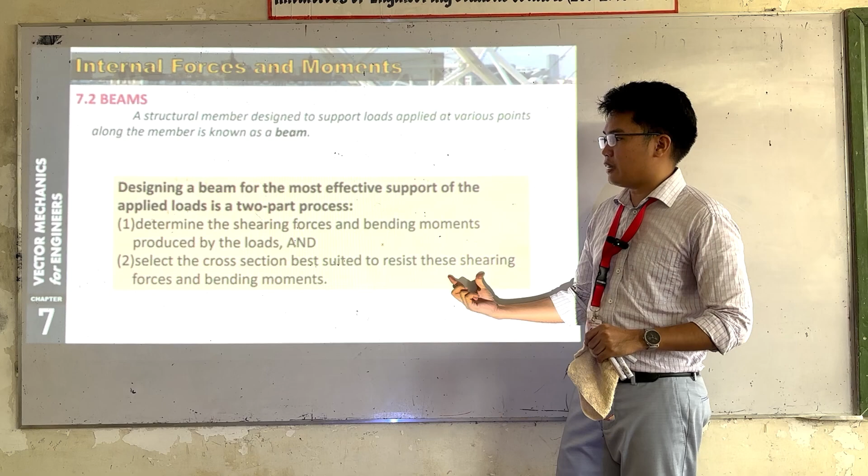So dalawa yung approach natin dito kung mag-design tayo ng beam. First, we should know ano yung value ng bending moment at saka shearing force natin dyan. Kasi sa 164, yung stress natin is just force over area. Yung force natin dito, somehow yung in-apply natin sa beam is a shearing force.

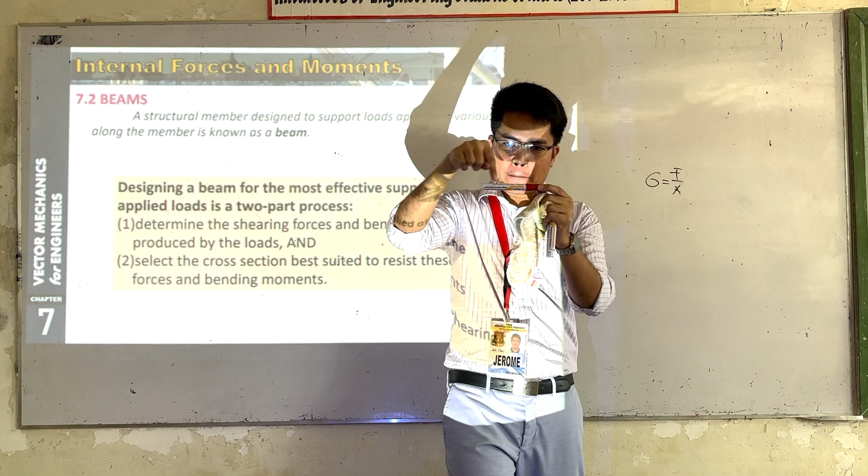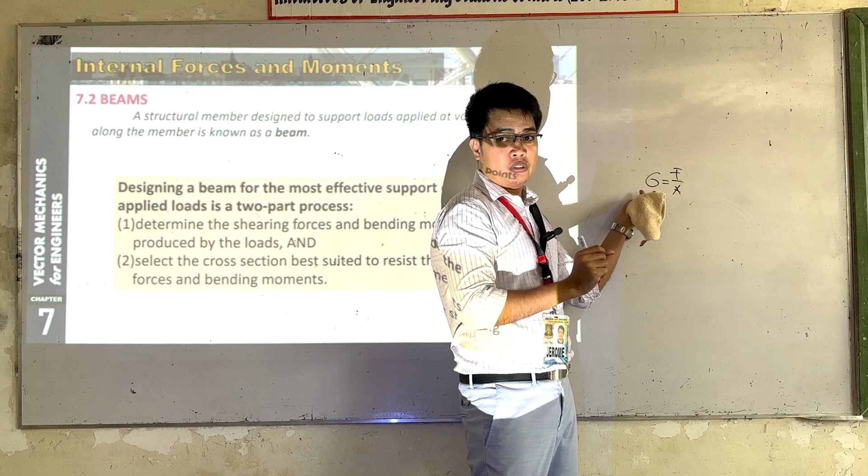Kung malalaman mo yung nasolve natin kanina, sa beam natin, at every point, iba-iba yung shearing natin. Kung mahahanap mo yung pinakamalaking shearing, at that point yung unang mag-fail. Bakit? Kasi kung makuha mo yung shearing force na maximum dyan, alam mo that the stress is directly proportional to the force. Ibig sabihin, kung nasaan yung pinakamalaking force, dyan yung pinakamalaking stress. Kung dyan yung pinakamalaking stress, dyan na point unang mapifail yung beam natin.

So ayan lang, for this topic, sa ENS 164 na to. Di ba, two parts? The first part here is ENS 161. The second part ng pag-solve natin dito na i-insert si ENS 164. So at this part, dito na malalaman kung ano yung klaseng beam na standard na gagamitin mo. I-beam ba, rectangular beam ba, or anong mga beam? Nakatabulate yan sa 164.

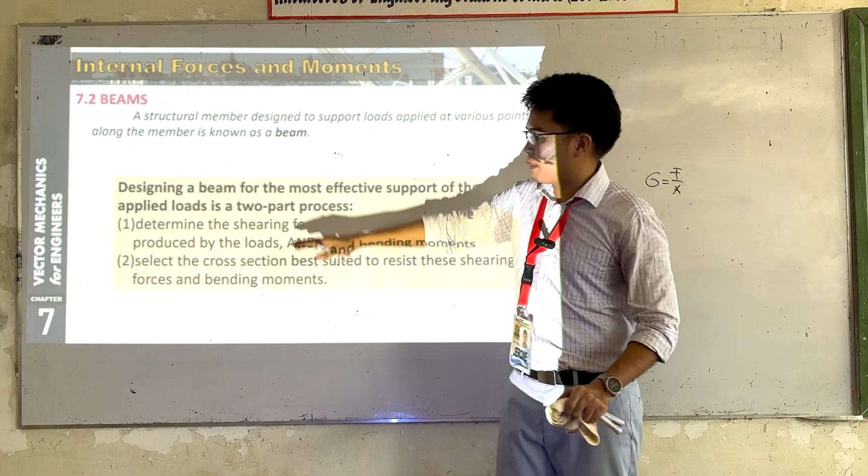So since 161 pa tayo, dito muna tayo, sa first part. So paano natin yan i-solve? Dalawa yung approach, so first approach natin ito muna. Before that pala, discuss muna natin dito.

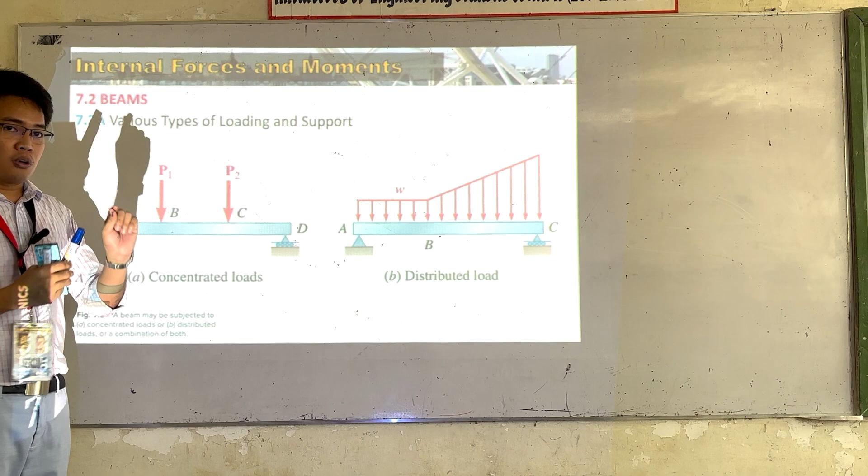So yung beams natin, meron dalawang klaseng load na pwede natin i-apply. One is concentrated load, wherein yung load natin is kino-concentrate natin at one point. And then we have distributed load, nakadistribute yung load. We have here, kung straight line, ibig sabihin, yung tawag natin dito is uniformly distributed load. Kung sasabihin sa problem na a uniformly distributed load is applied at that point, at that segment, ibig sabihin niya dito is yung load is a straight line. And then we have here, ayan, pag ganito.

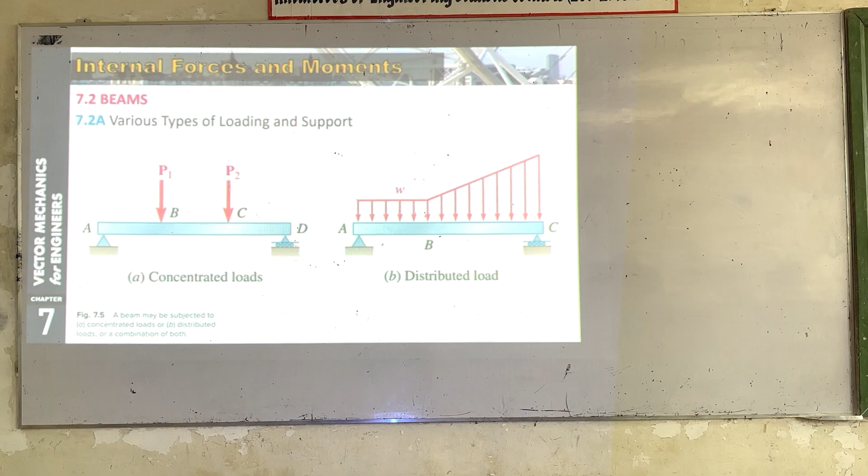So we have concentrated and distributed load. How about mga beams natin, application? We have for trusses or roof support, for example ito siya. So iba't ibang klaseng beam. If we have a combination of a pin and a roller, yung tawag natin sa beam na to is a simply supported beam.

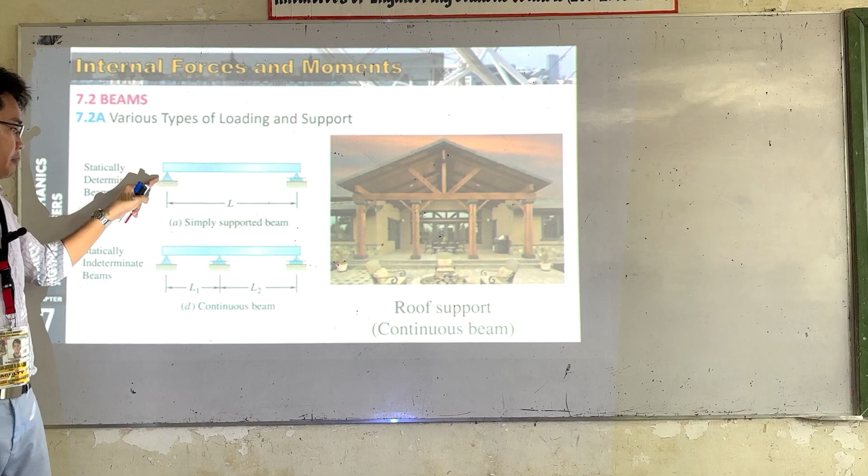Okay? Now kung mag-apply pa ako ng another roller dito, ilang unknown dito? Isa, dalawa, and then meron din tayong dalawa dito. So 4 unknowns, 3 equilibrium equations, this kind of beam is statically indeterminate. So dito, masosolve pa natin to using 161. But at this part here, kailangan na natin yung knowledge natin sa 164 para masolve to.

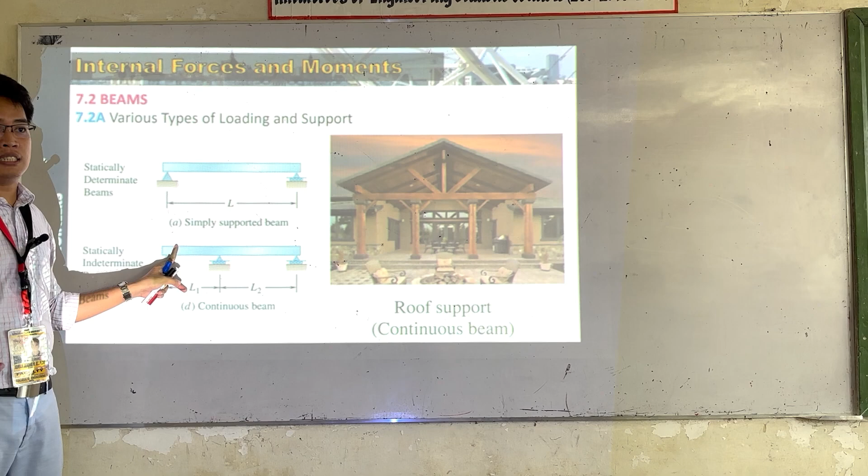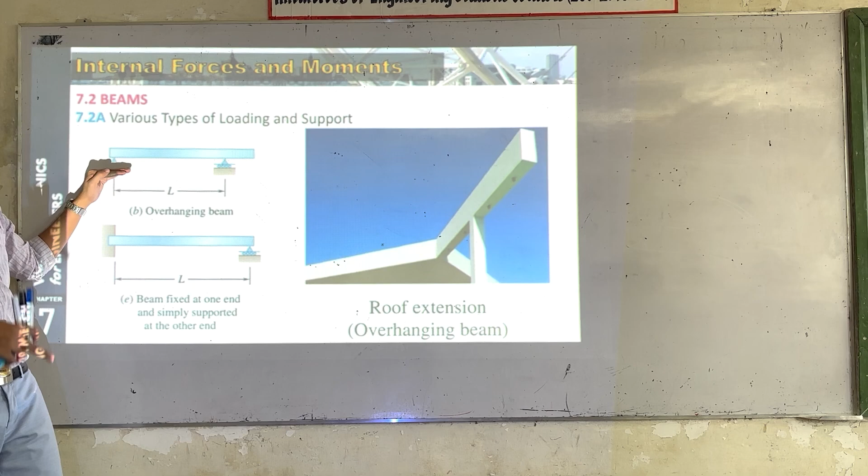Now kailan to maging statically indeterminate? Kung titingnan nyo dito, ilang reactions meron tayo dito? 3, plus 1, we have 4. So statically indeterminate na siya. Okay? Overhanging beam. We have also cantilever beam. Cantilever beam is fixed at one end, the other end ay walang support.

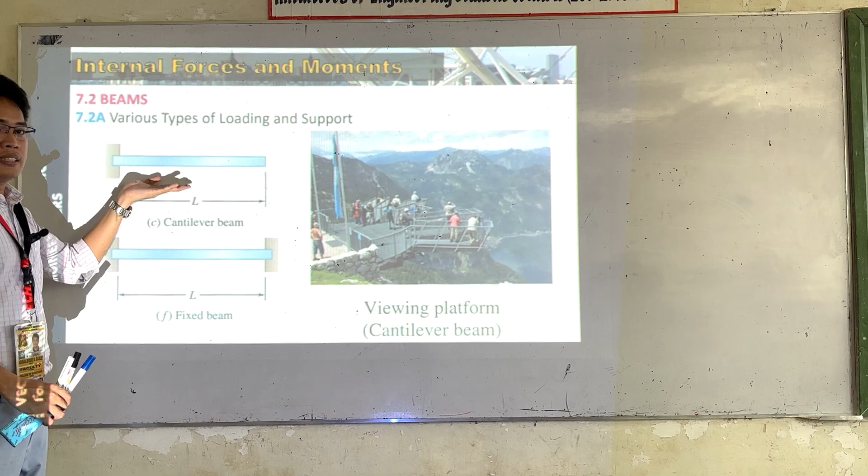Statically determinate, di ba. Kasi tatlo lang yung unknown. So kung lalagyan pa natin dito, ilang unknowns na dito? We have 6, so hindi na natin ito masosolve. Kailangan na natin ng ENS 164.

So cantilever beam. Kailangan kayong familiarized sa mga tawag ng beam dito, kasi minsan sa exam sinasabi lang na a cantilever beam, an overhanging beam, hindi na sinasabi kung hindi na binibigay yung picture. Diretso na. So kung sabi niya overhanging beam at hindi mo alam kung ano yun, wala kang masosolve.

Ngayon, yung diniscuss natin kanina - kung may member tayo, at may in-apply tayong forces papunta doon at saka papunta dito, isa yun multi-force member. Tapos kinat natin dito sa portion na yun. Ano yung sabi natin kanina? Merong lalabas na internal forces at saka bending moment natin.

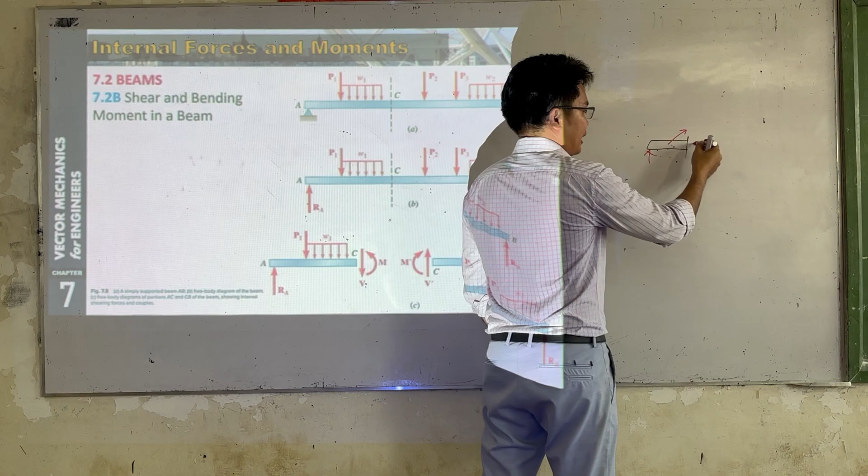Ano yung mga internal forces na yan? We have axial at saka shearing, and then we have a bending moment.

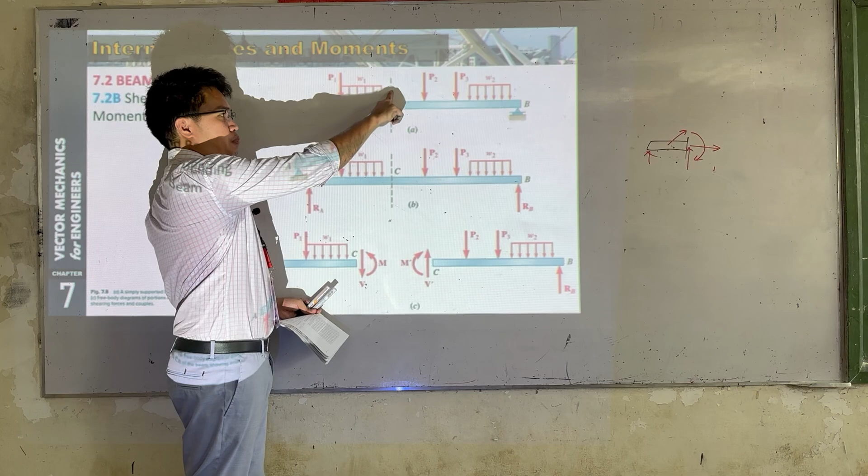So for example, we have a beam here, meron tayong uniformly distributed load and concentrated load na in-apply at different points. Ano yung gusto nating malaman ay yung internal forces at saka bending moment sa isang specific point. Anong gagawin natin? I-cut natin yung portion na yan. Pag-cut natin yung portion na yan, ano yung lalabas? Ito yung mga internal forces. At sa pag-drawing natin dito, meron tayong convention na pina-follow.

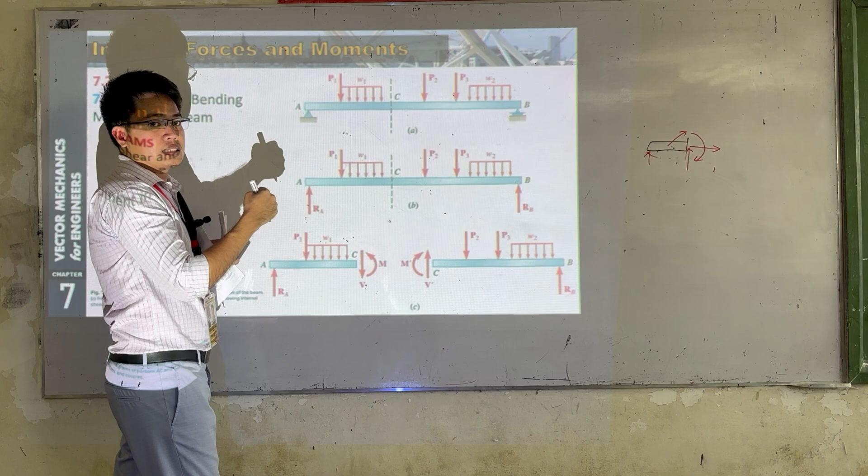Kung yung pag-cut natin, cut natin dito sa C, at kung gusto mong i-analyze yung left, pwede tayong mag-analyze sa right or sa left. Kung pipiliin natin yung left, ano yung convention natin? Yung shear natin should be downward, at yung moment natin ay counterclockwise. Ito yung always convention para the same tayo lahat ng answer.

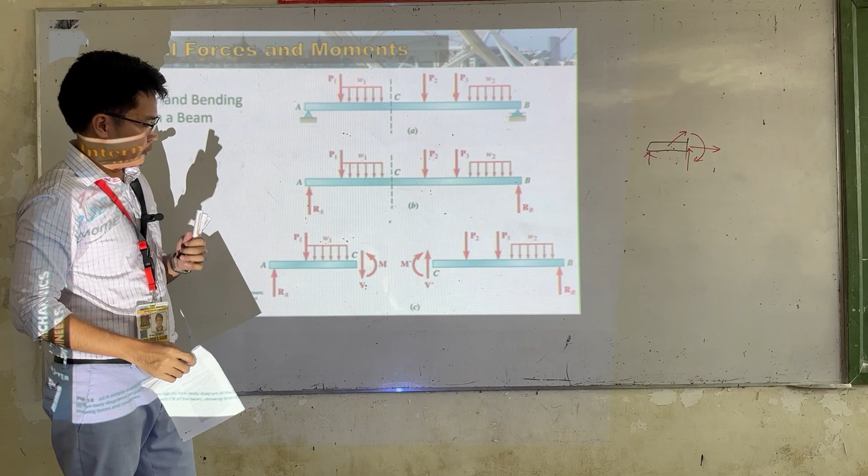Kung ito naman yung gagamitin mo, yung moment mo dito is clockwise, at ito siya is upward. So follow this convention para hindi iba yung sagot mo. The same tayo lahat ng drawing.

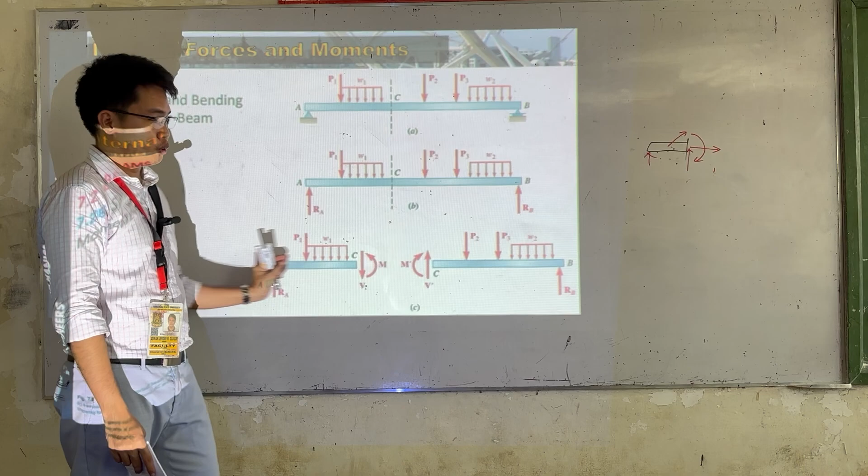Yung gagawin niyo lang dito, mostly naman sa lahat ng problema, yung ginagawa natin is ito yung pinipili natin, the left side. Left side yung i-analyze natin para mas easier sa drawing, kasi from left to right yung pagka-drawing mo sa graph.

Okay, so ito na lang yung gamitin natin, the left side. At take note, downward shear and counterclockwise moment. Kung negative yung makukuha mong shear at saka moment, ibig sabihin baliktarin lang natin yung direction. Yan yung sabi ko kanina, convention.

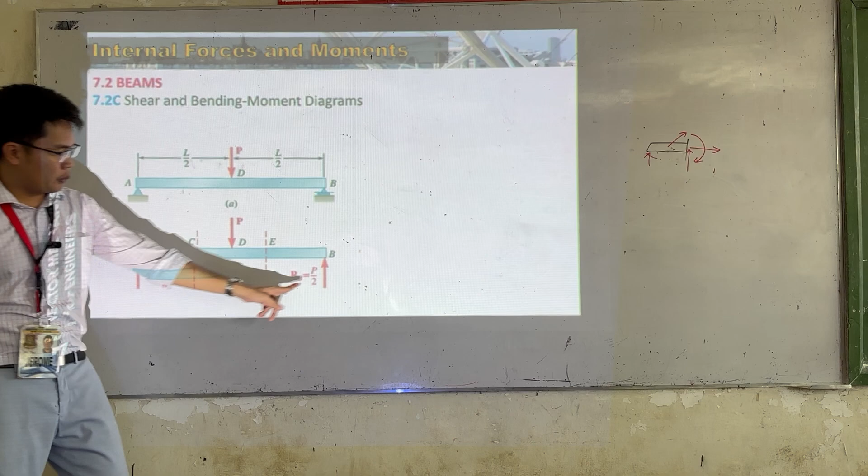Take for example this picture here. Assuming that we have a known load applied at the very center, P. So ibig sabihin, the reactions of the support equal sila, 1/2 P, 1/2 P. Assuming ito na yung image natin, ito yung reaction: 1/2 P, 1/2 P, and then P is applied at point D.

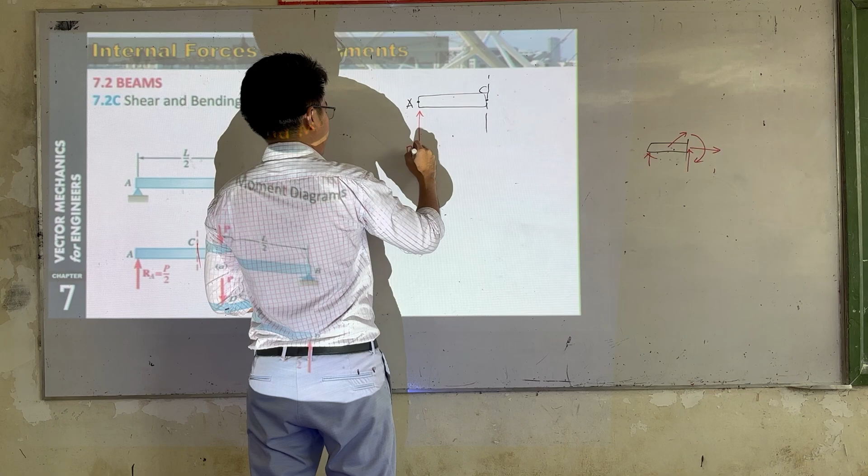Ngayon, ano yung gusto kong malaman ay ano yung internal dito kung i-cut ko yan. So kung i-cut ko yan, ano yung mangyayari? We have, this one here is our A, this one here is our C. Dito tayo nag-cut, so we have a force na RA is equal to P/2.

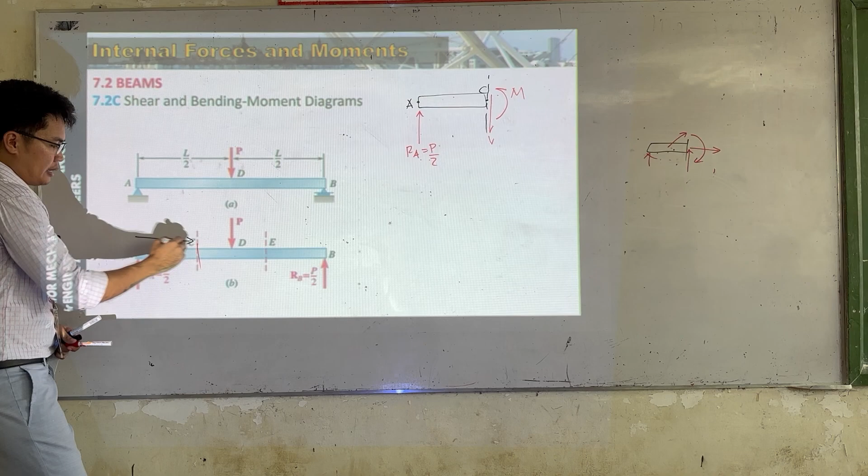Ano yung convention natin dito? Downward shear and counterclockwise moment. Arbitrary to - yung point C natin is somewhere in between A and D, kahit saan basta kayo in between dito. So assuming na lagay natin distance x para arbitrary.

This distance here, ayan. Ano yung value ni shear? Ano din yung value ni moment? Paano natin yung i-calculate? Para makuha yung shear, paano natin kukunin si shear?

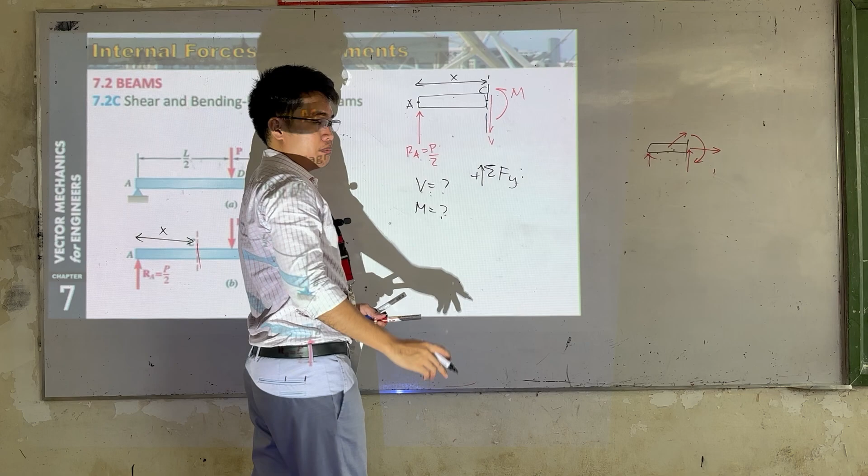Summation of forces along y, positive upward, equal to 0. So we have here upward P/2, and then dito downward we have negative V. That should equal to 0. Tama? So therefore yung V natin is just equal to P/2. Nakuha na natin si V.

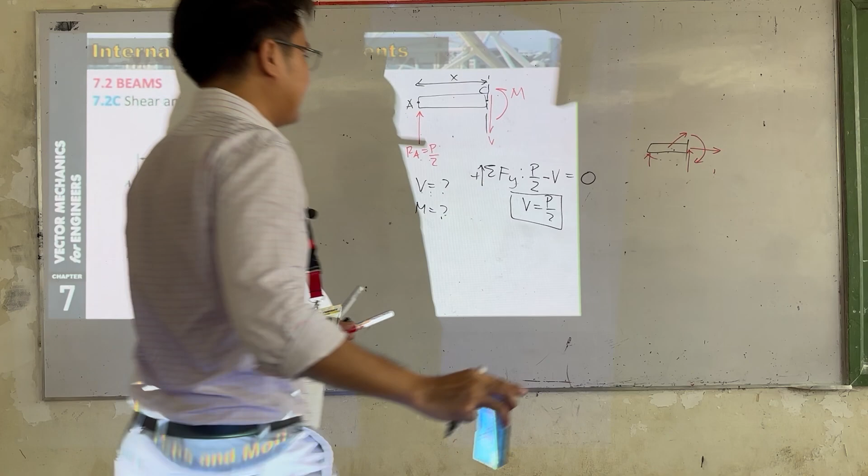Ngayon, sa pag-graph natin sa shear and moment diagram, ito yung shear natin, Y-axis, at ito yung span natin, the X. By the way, the distance from this support papunta dito ay yung tinatawag nating span. Yung span natin, sabihin natin yung distance niya is L.

Point C natin is in between A and D. Kung titingnan mo dito, at any distance from point A, any distance yan, always yan x, arbitrary. So therefore yung shear pala natin from this point A papunta dito sa point D ay constant. We have a value of P over 2.

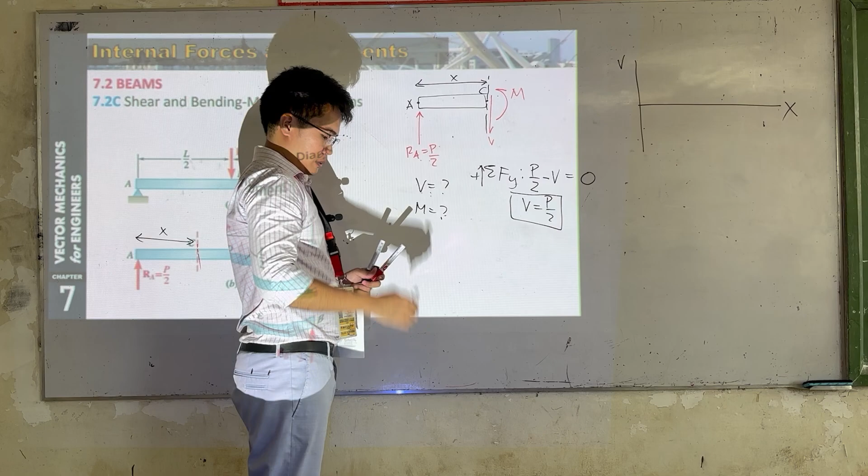Sabihin natin this point here is our point A, dito. Meron siyang shearing na pupunta sa taas - we have P over 2. So pupunta ka dito sa taas by an amount na P over 2. Ngayon, in between A and D, ano yung nakuha nating shear?

We have P over 2, constant yung value. So ibig sabihin, constant din yan. Pagdating natin dito sa point D, ano yung value ng shearing natin? Meron tayong shearing na P. So pupunta tayo downwards by an amount P. Kung ito siya 1/2 P, the total is P.

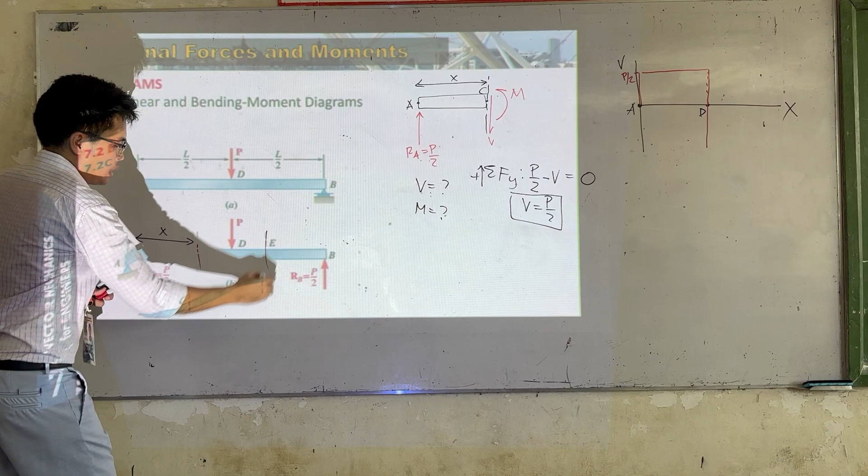Okay, dito na naman tayo sa point E. Point E is in between D and B. Arbitrary din yan, at a distance, sabihin natin X. Kung kukunin natin yung value niya, the same pa rin, no?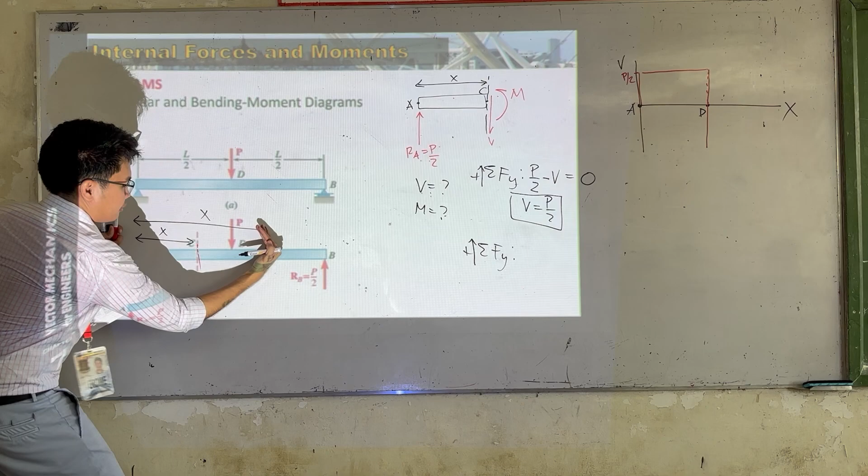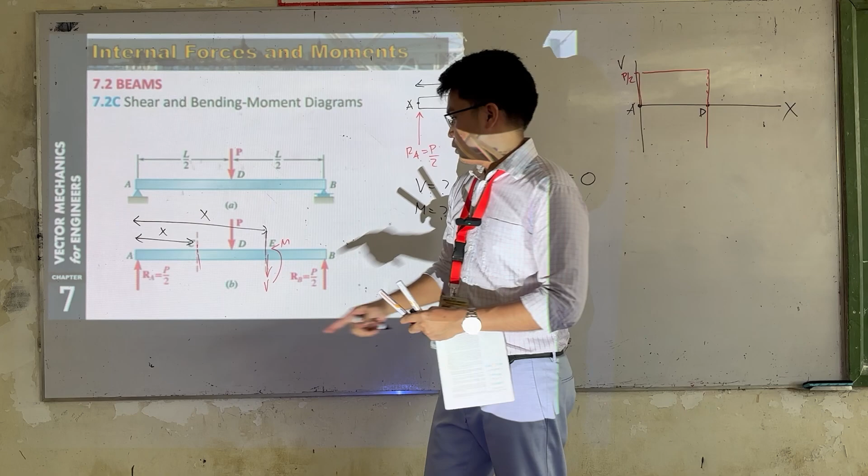Summation of forces along Y is equal to 0, positive upward. Kung ito lang yung titingnan natin, wag natin tingnan to, ito lang. Ano yung mga involved? We have P over 2 na positive and negative P. So we have P over 2 minus P. Ano yung lalabas dito? We have shearing na downward and then counterclockwise moment. So meron tayong downward na shear, we have minus V is equal to 0.

So therefore yung V natin is negative P over 2. So itong E natin is between D at saka B. So everything under or in between D and B natin, yung shear natin is negative P over 2. Therefore constant yan, constant. Yung value niya is negative P over 2.

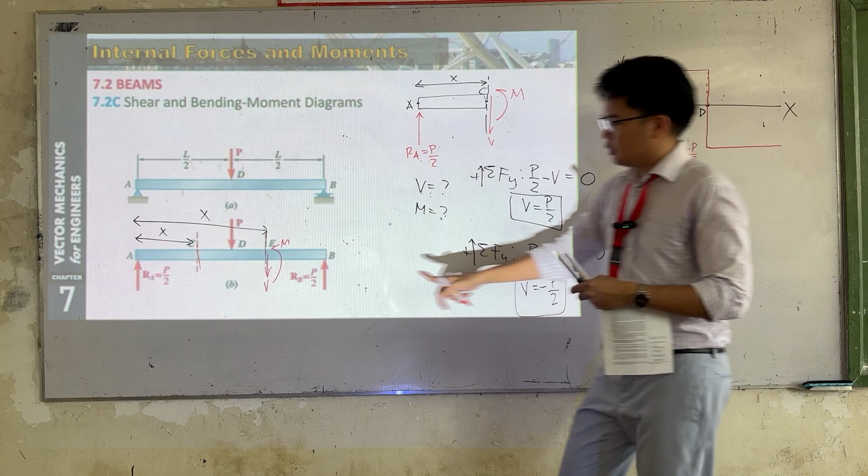Now pagdating natin sa point B, dito meron tayong shearing na P over 2 positive. So isum up natin dito. Kung ito siya negative P over 2 plus P over 2, that is equal to 0. So babalik yan sa 0. So ito na yung i-shade natin to, ito na yung shear diagram natin.

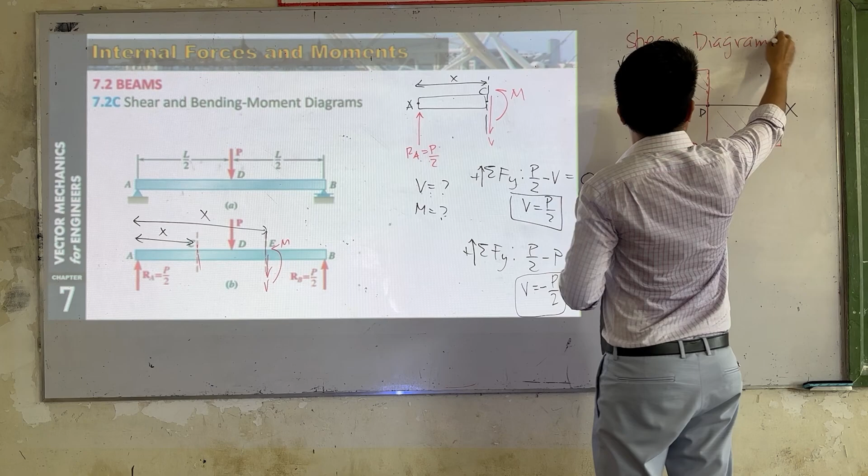Our shear diagram. So sa shear diagram natin, sabihin natin sir, ano kaya yung value at this point? Titingnan mo lang sa diagram natin, ano yung point na to. Yung dyan na point, yung value niya is this point here. Ano yung value niya? Negative P over 2. So ayan lang, using this shear diagram, makikita natin lahat ng shearing at every point ng beam natin.

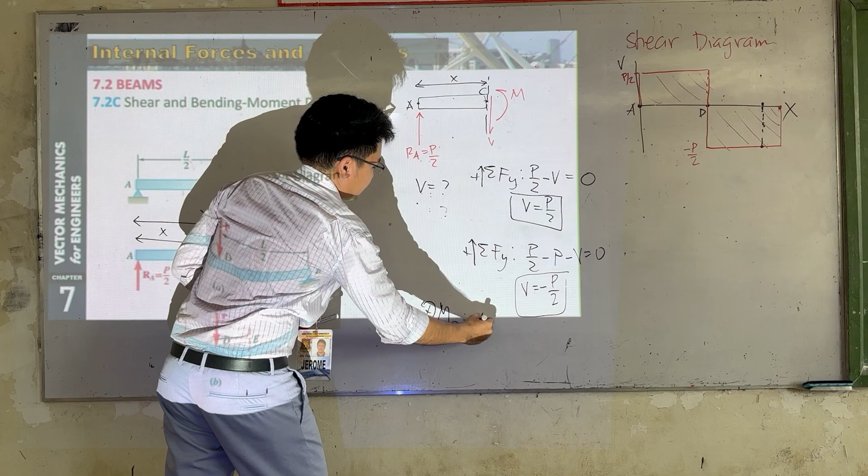Okay, how about moment? Sige daw, so moment. Analyze natin yung moment, dito muna tayo sa A to C. May lumabas na to. Summation of moment at point C, counterclockwise positive. Ano yung involved? This one here is negative, tama? Negative P over 2. Ano yung moment arm? We have X. Meron pa bang moment? Meron pa, itong M.

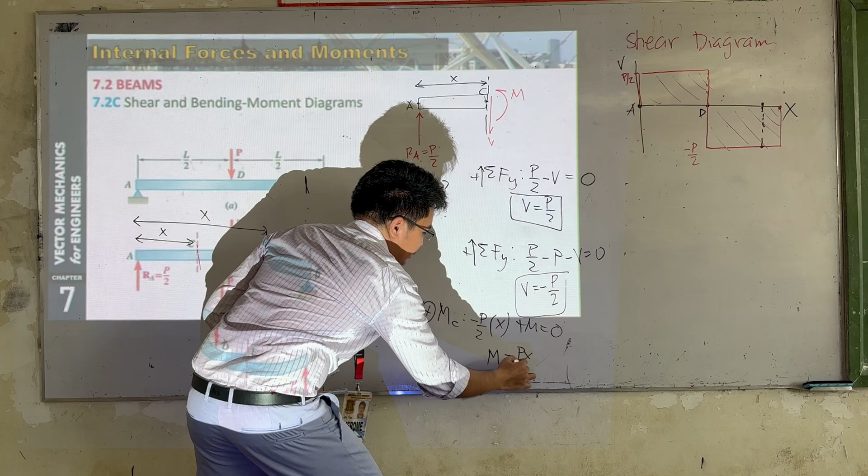Positive, negative? Positive. So we have positive M is equal to 0. So therefore yung M natin is equal to Px over 2. Okay, so Px over 2.

Now sige, gawa tayo ng moment diagram. So ito yung moment, ito yung X natin. At point A, may nakikita ba kayong moment dito na nilagay? Wala, di ba? Shearing lang, RA. Ano yung moment natin dito? 0. Okay, so yung moment at point A, we have 0.

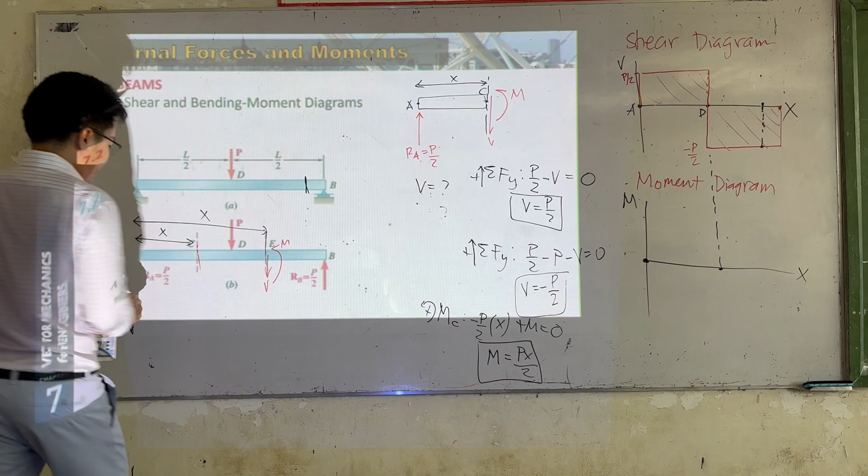Now dito sa point B, ayan. Ano yung moment natin between A and D? Di ba sinolve natin yan? Yung moment natin between A and D is M is equal to Px over 2. Now ano yung graph ng Px over 2? Linear, quadratic? Linear kasi x to the power of 1, to the power of 1 meaning linear.

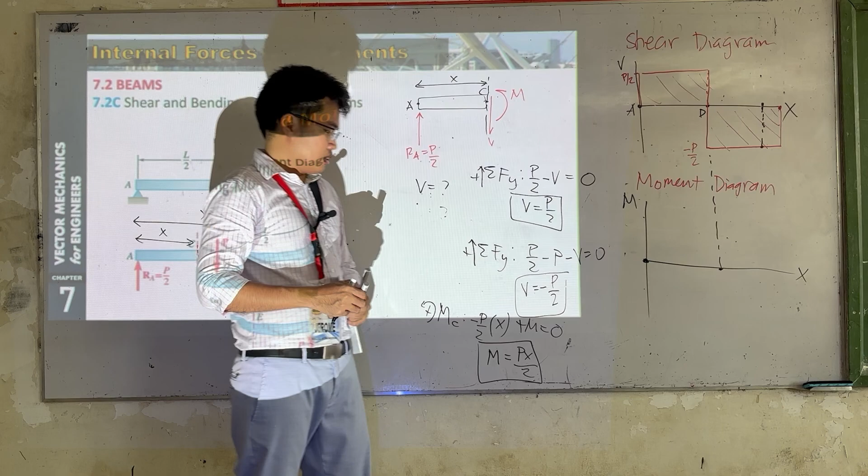So kung linear yan, ano yung kailangan natin? We need only 2 points in order na makakreate ng line. So ano yung mga point natin na pipiliin? So we have M at x is equal to 0 and M at x is equal to, a to d man yan, so from 0 to d. Ano yung x natin sa d? We have L over 2.

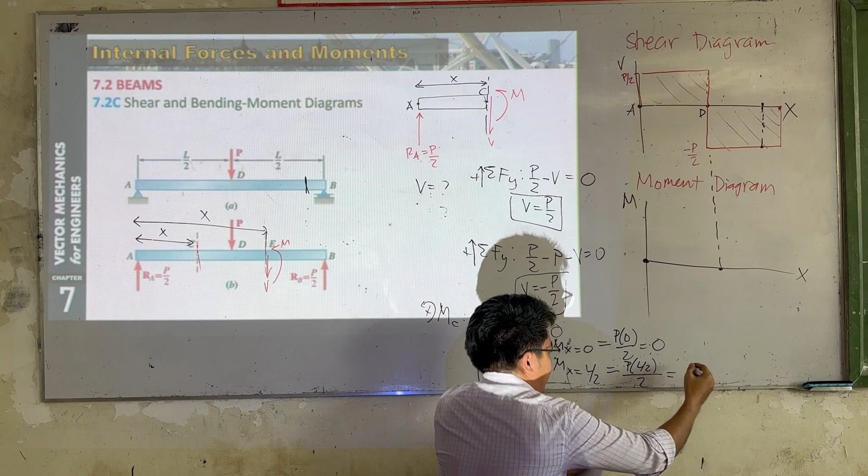So ayan, substitute lang natin, no? We have P times 0 over 2, this is 0. Ito naman, P times, ano yung X natin? L over 2 over 2 natin. So this one here is PL over 4. Tama? So at X is equal to 0, moment daw is 0. At X is equal to L over 2, at this point here, yung moment natin is PL over 4. So somewhere positive, di ba? So somewhere dito, sabihin natin this one here is PL over 4.

Over 4. Now ano ulit yung sabi nyo? Ano yung graph nito? Linear. So ibig sabihin...

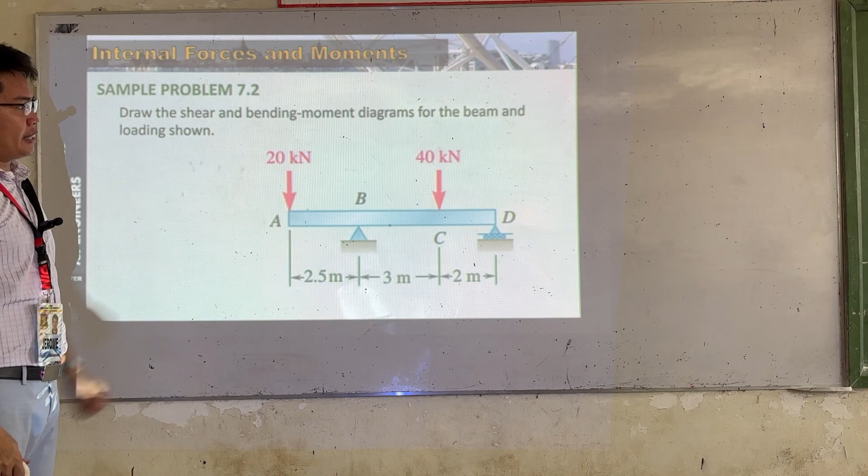Sige, ito. Ano yung sabi niya dito? We have: draw the shear and bending moment diagrams for the beam and loading shown. So we have here, anong tawag dito? Iba na naman yan, no? Kasi nandito, sige lang, overhanging, no? Overhanging beam. So sige, let's draw the shear and moment diagram.

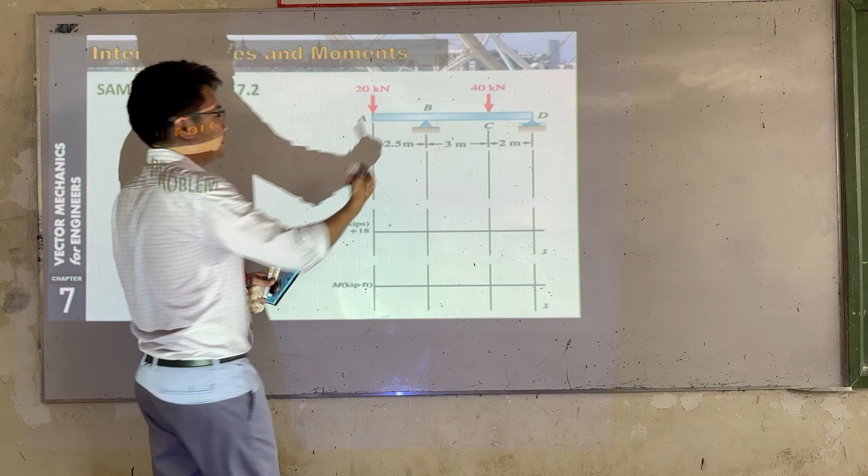Ayan, so ano yung gagawin natin? I-cut lang natin, no? So ilang segment yung i-cut natin? We have 1, 2, 3. Okay? So paano natin i-drawing yung shear? Sa shear muna, simula tayo sa point A. So sa point A, may nakikita ba kayong shear? Meron, no? 20 kilonewton. So bababa ka ng 20 kilonewton, no?

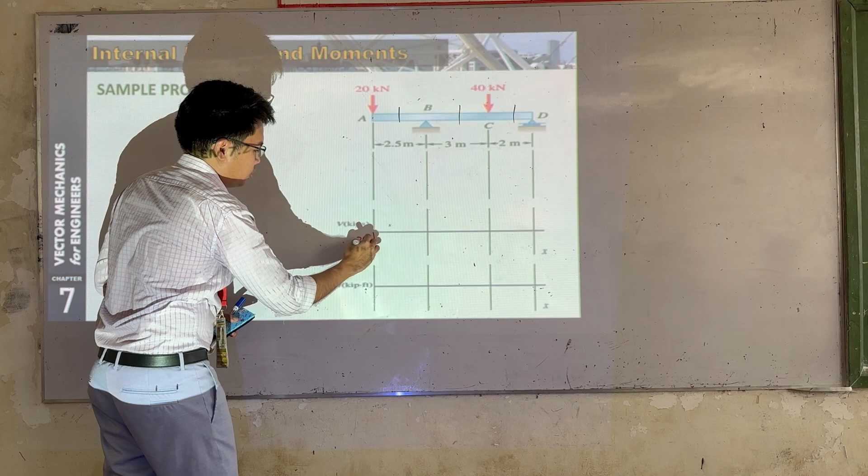We have 20 kilonewton at that point. Now what is the shear between A and B? So what do we do? We cut it. So if we cut it here, somehow this is the image.

We have a shear of 20 kilonewton. What comes out? We have a downward shear and a counterclockwise moment. So what is the distance? We always use x. Okay, let's solve.

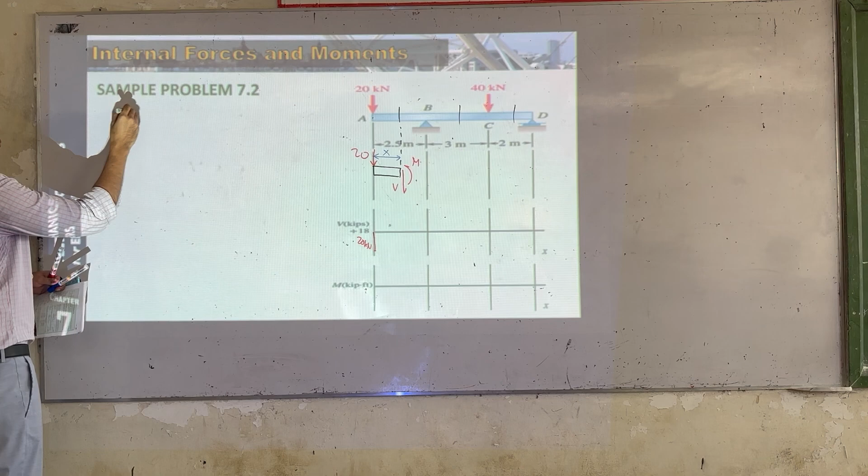We have summation of forces along y, positive upward. We have negative 20 minus V is equal to 0. So therefore V is negative 20.

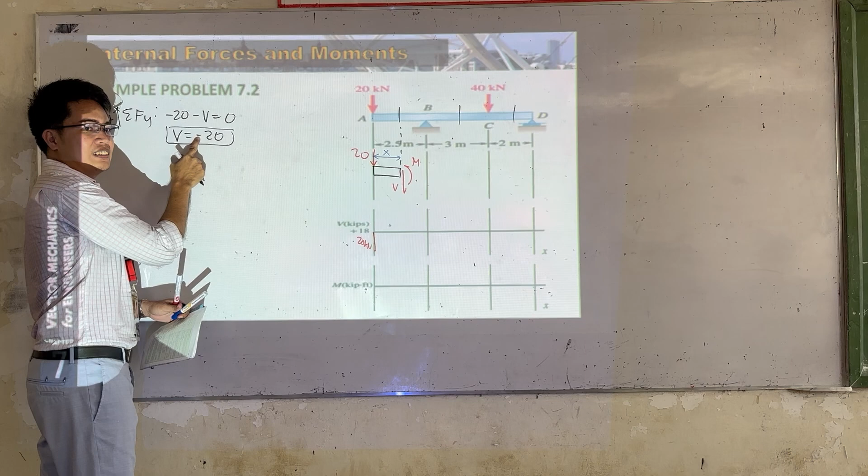So the shear between A and B, what is the graph of this? Linear? No. What is the graph? Constant. What is the graph of a constant? Flat. So it's negative. The graph is negative 20. So from A to B, it's constant at negative 20.

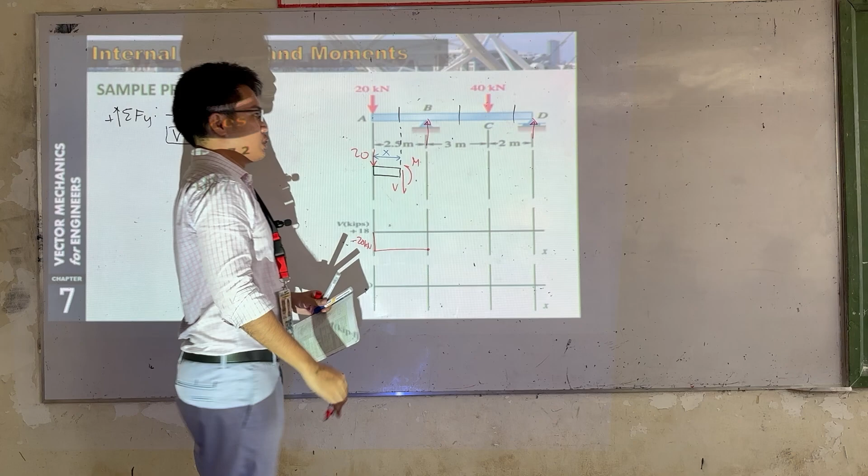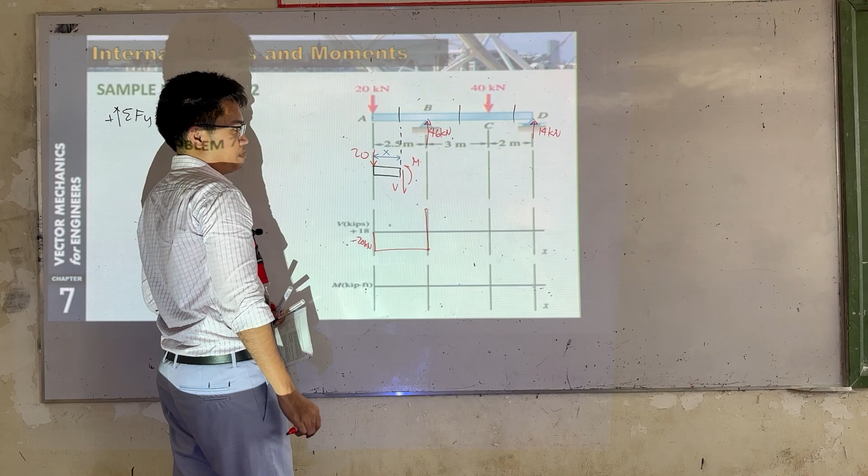So what is our shear at B? 46 kilonewton, meaning we go up 46 units. So what is the value here? We have positive 26 kilonewton.

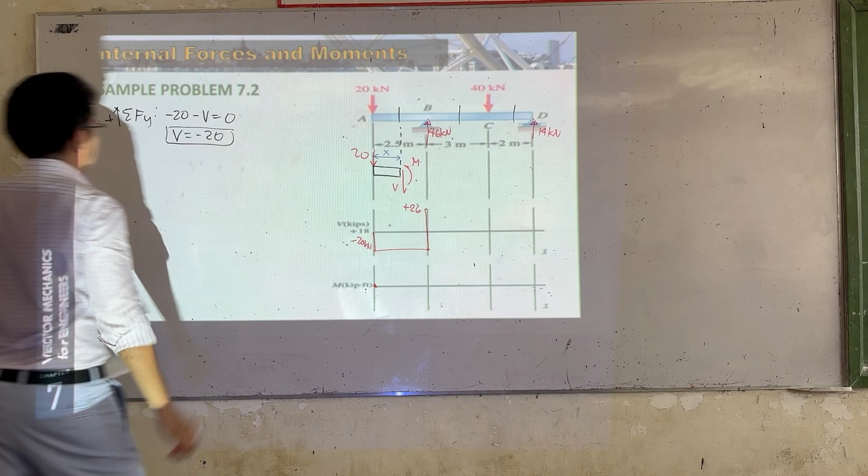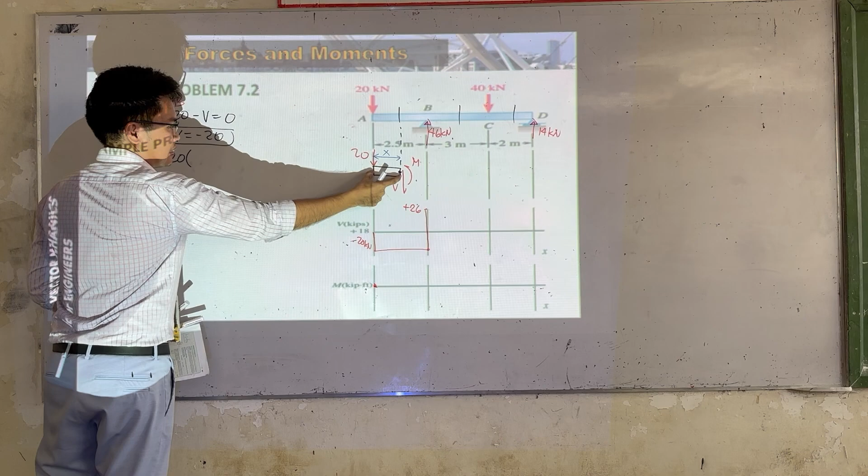Now for segment AB. Summation of moment, where do we take it? At this point. Positive. So what are the moments? At this point we have positive 20 times the moment arm, which is x. Is there another moment? Yes, so positive m is equal to 0.

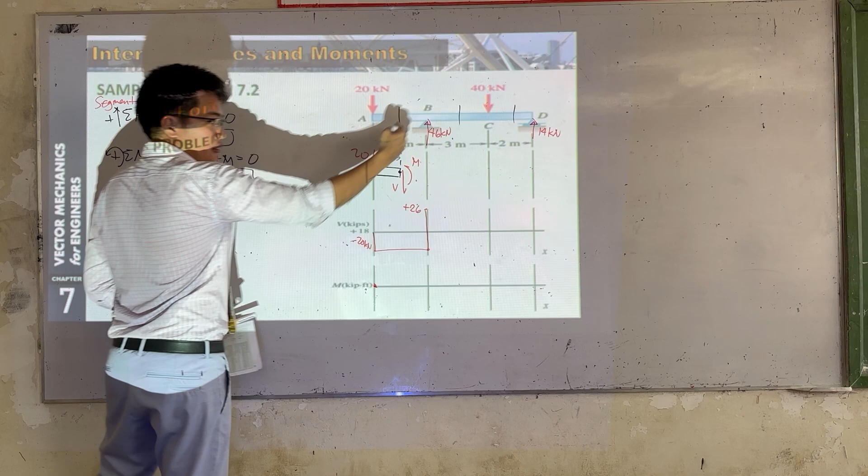So our m here is negative 20x. What is the graph of this? Linear. So what do we need to form a line? Two points. M at x equals A to B. So at x is equal to 0, and then another at x equal to 2.5.

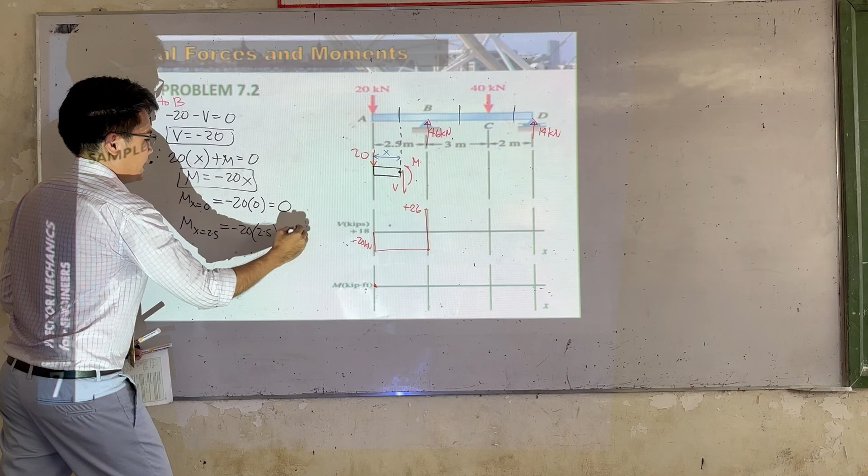So let's substitute. Negative 20 times 0, we have 0. So our answer is correct, at x equal 0, moment is 0. Now, negative 20 times 2.5, what is this value? 50. So this is equal to negative 50. Therefore the moment at point B is negative 50.

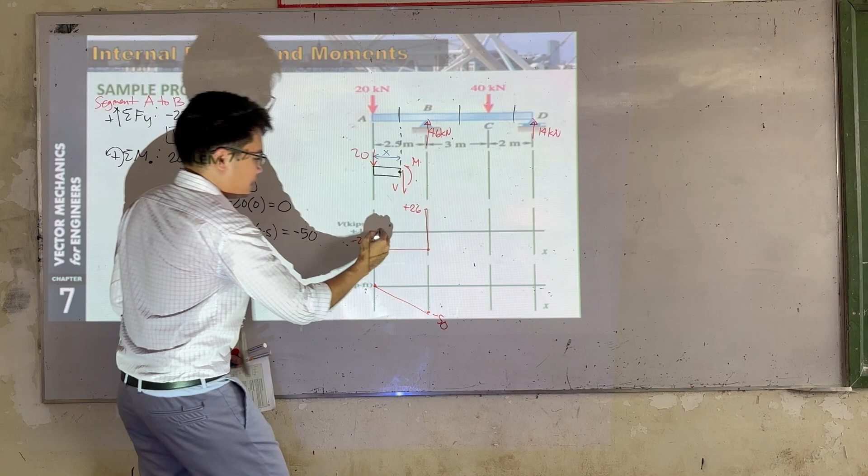So what is the graph of this? Linear. So we just connect it by a line. So we got the segment AB, and also its moment.

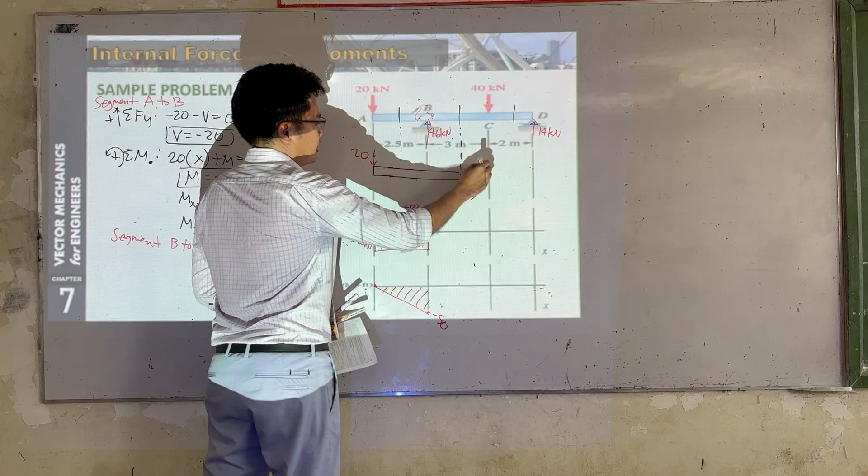Now let's go to the segment B to C. So what do we do? Erase this, and extend our segment like this. Now what comes out? Downward shear, counterclockwise moment. What is the distance? We keep repeating this, x.

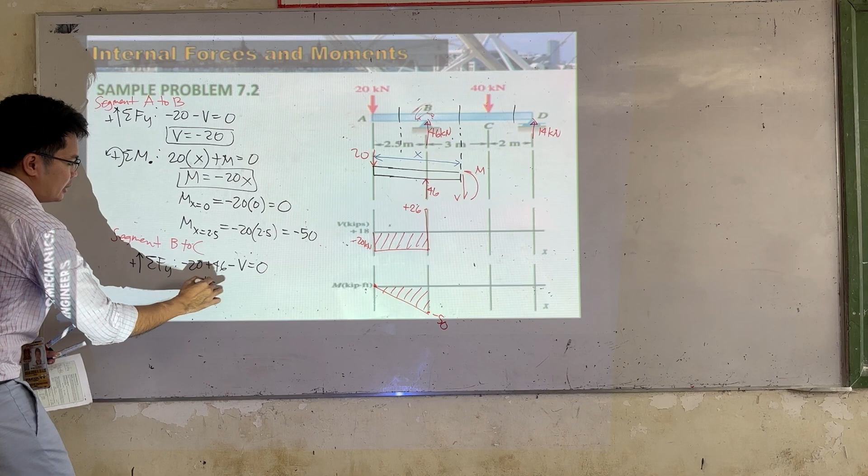So summation of forces along y, positive upward. What's involved? Don't forget we still have 46 upward. We have negative 20 plus 46 minus v is equal to 0. So our v here is positive 26.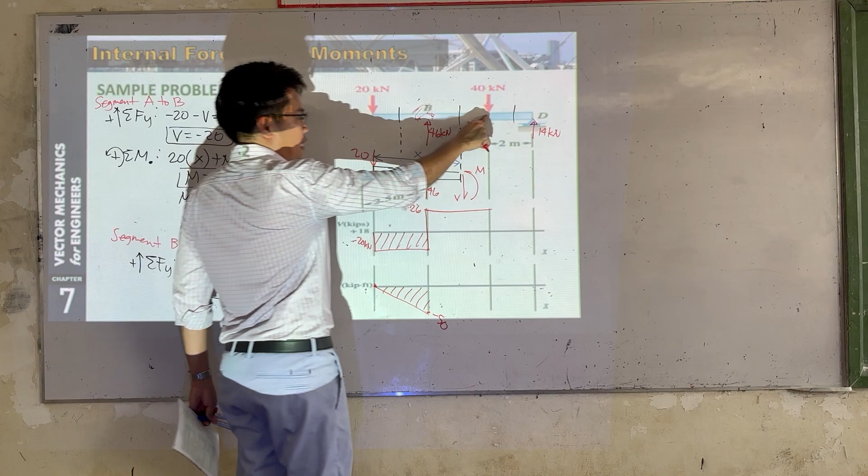What is the graph of this? It's constant. So from B to C, constant at 26 is the shear, flat. Now when we reach point C, we go down 40 because there's shearing there. So what is the value? If this is 26 and we go down 40 units, the value is negative 14. So we got the shearing from B to C.

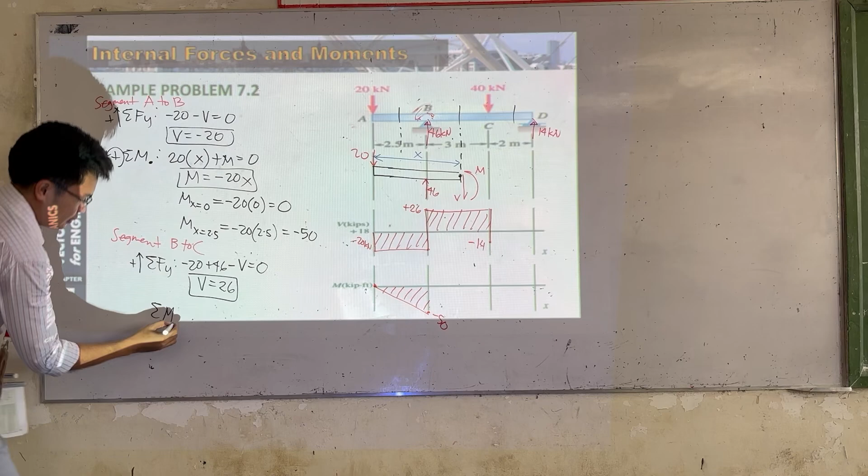So let's go to the moment. How do we get it? Summation of moment at this point, counterclockwise positive. So what do we have? We have positive 20 times the moment arm, what is the moment arm? x. And then this one here is negative 46.

Ano yung moment arm? Moment arm niya is ito, which is x minus 2.5. So we have x minus 2.5.

Meron pa ba? Meron pa. We have positive m is equal to 0. Ano yung moment natin dito? Moment is just 46 times x minus 2.5. Wait lang, 46, this is 26, no? And it's positive, so 26x.

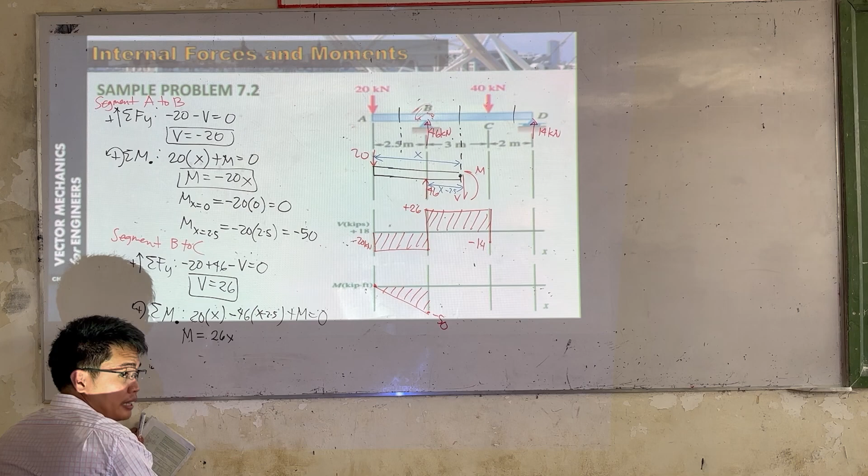How about this one? 115? So 115 negative, no? Negative. Anong sabi nyo? Negative times negative, positive. I-transpose natin sa kabila, magiging negative.

Okay, so ano yung graph nito? Linear. Ano yung kailangan? 2 points. So mx at, ano yung value ng x? Pinakauna.

That is, from B to C tayo, that is from 2.5 to 5.5. So yung first x is 2.5, yung second x is 5.5. Isolve natin to. We have 26 times 2.5 minus 115, and then dito is 26 times 5.5 minus 115. Pwede pa solve?

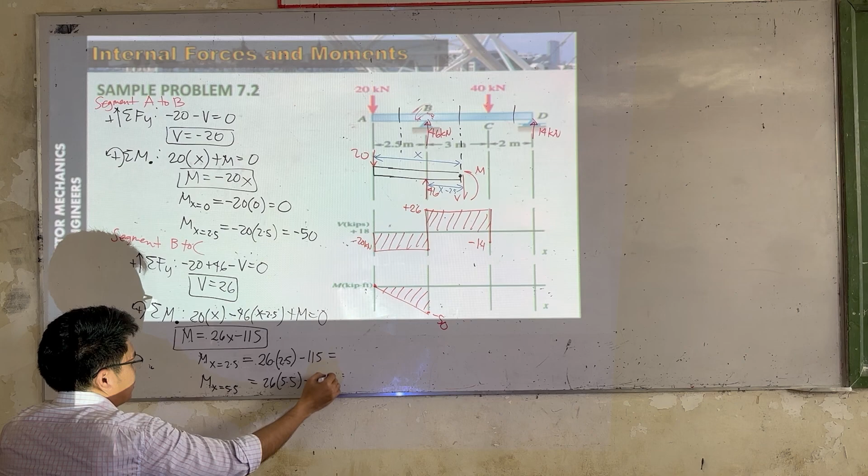Ito is negative 50. Okay, 28. At x is equal to 2.5, ito siya. Yung makuha daw natin is negative 50. So the same, stay put lang.

Then at this segment here, we have 28. Sabihin natin nandito yung 28, no? This one here, we have 28. So ano yung graph natin? Linear. So gawa lang tayo ng straight line.

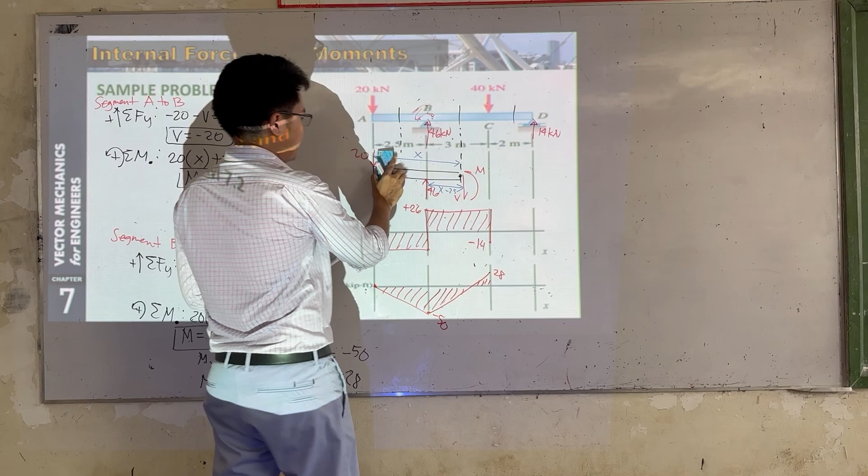So ayan lang, nakuha na natin yung graph sa segment BC. So last, dito na tayo sa CD. Erase natin to, so ayan. I-cut natin dito daw.

Ayan, so ano yung mga involved dyan? Meron tayong 46 kilonewton, and then meron tayong 40. Dito we have downward shear counterclockwise moment as always. Okay, so therefore ano yung distance na to? We have x. Ano yung distance na to?

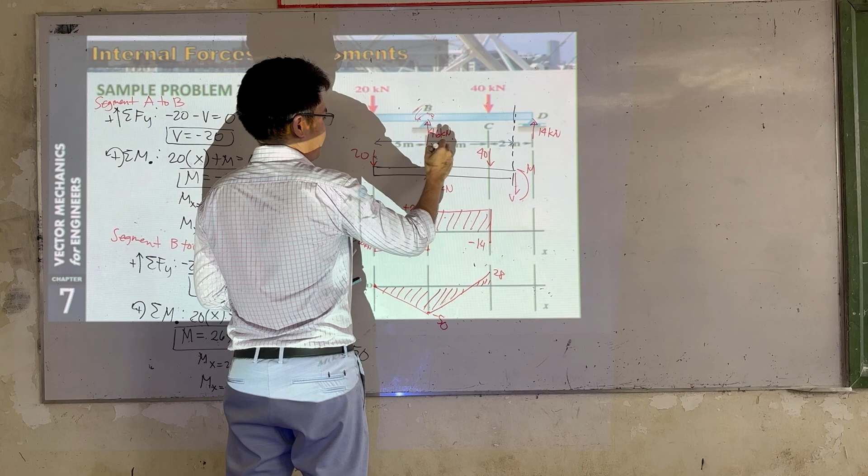We have x minus 2.5. How about ano yung distance na to? We have x minus 5.5. So ayan lang, very easy lang, no?

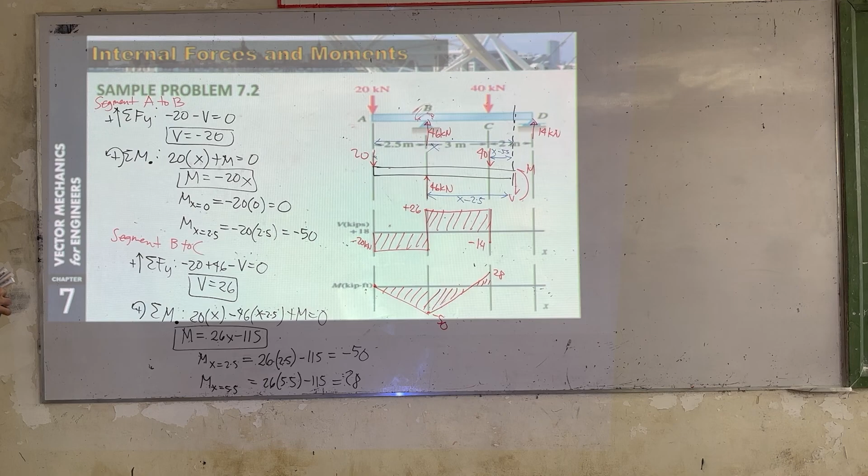So sige, punta na tayo sa segment C to D. Tama ba? C to D. So the same pa rin, no? Summation of forces along Y, positive upward. We have ano yung involved?

Negative 20, positive 46, minus 40, minus V is equal to 0. So V is equal to, ilan eh? Positive, negative, negative 14, no? Negative kasi, negative V, i-transpose sa kabila. Transpose sa kabila, then divide negative. So ayan lang, negative 14.

Ano yung graph nito? Constant, no? So constant yung graph natin sa segment CD. Diyan lang ba tayo mag-i-end? Meron pa tayong shear dito, 14. So kung negative 14 to, plus 14, babalik sa 0.

So ayan lang, pwede na natin itong i-shade. Always bumabalik sa 0, no? Kaya kung hindi babalik yan sa 0, kulbaan na ka. Same din sa chapter 6, sa checking natin sa method of joints, kung hindi mag-0 yung pinakalas na segment, mali yung answer mo. Dito somehow, some of the problems dapat babalik talaga sa 0. So ayan, hindi, always good talaga babalik sa 0.

Okay, sige, let's have moments. Summation of moment at this point here. Ayan, so ano yung mga involved? Positive counterclockwise, we have positive, no? Positive 20 times the moment arm. Pila moment arm? 7.5.

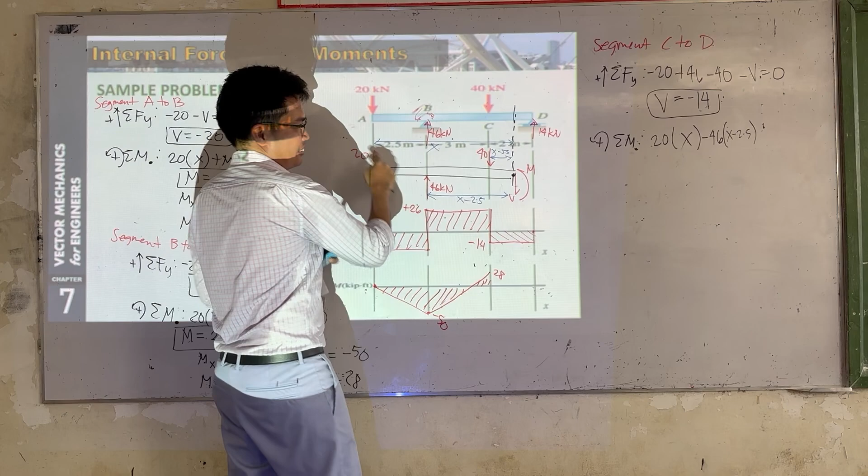And then negative 46, ano yung moment arm? X minus 25, ay 2.5. X minus 2.5. Ha? Ano? Ay sorry, x pala to, yung distance na to, no? Sakto. And then lastly, we have 40, positive, no? Times x minus 5.5 minus 2.

Is it equal to 0? Hindi pa, no? We have plus m is equal to 0. Sige daw, pakalculate daw, ano yung mga x? X muna, 20 minus 46 plus 40. Negative 6, 14, 14, no? We have negative 14, so m is equal to negative 14x.

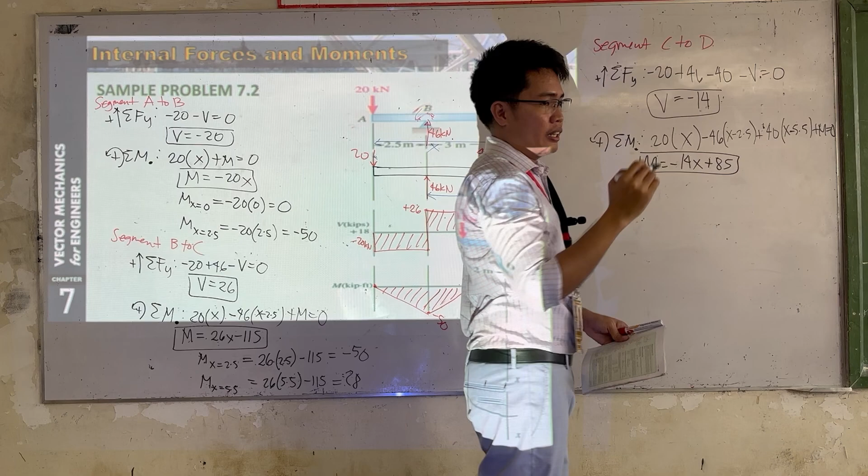How about yung mga constant dyan? Ilan na siya? Plus 85. So ayan lang, ano yung graph nito? Linear. So ano yung kailangan? 2 points, so we have m, x at, ano yung value ng x?

From C to D man tayo, so from 5.5 to 7.5. Tama? Ay 7.5 lagi, so we have 5.5. Substitute natin, negative 14 times 5.5 plus 85. Ano yung value nito? Pila? 28 or 8? So dili na 85. 115 to? 105. So 105 pala to.

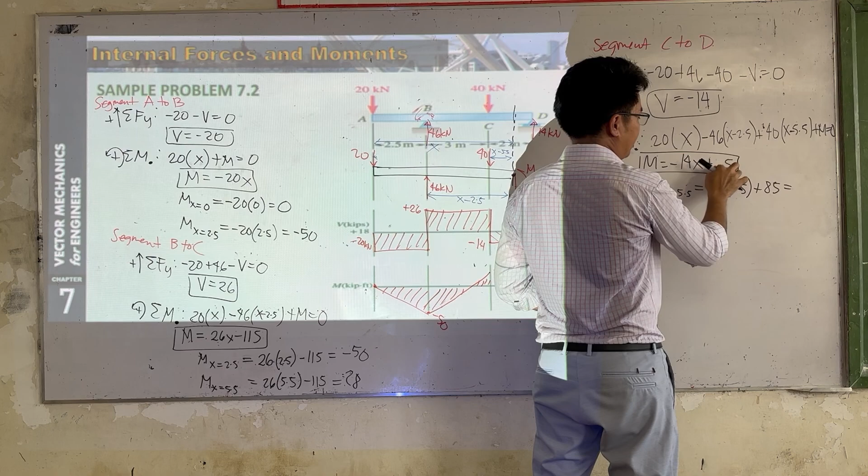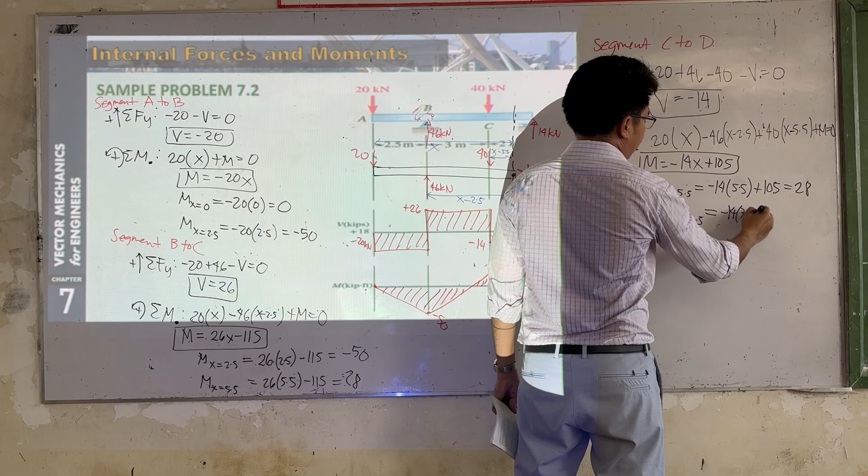105, so kung substitute natin dito, 105, ano yung value nito? 28, so sige, tama na tayo, no? 28. Okay, so at m, x at 7.5, substitute, negative 14 times 7.5 plus 105, we have, this should equal to 0. So babalik tayo sa 0.

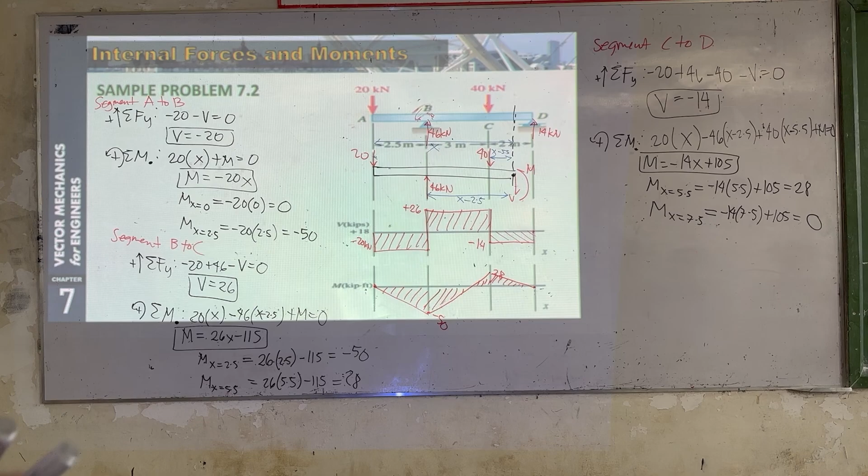So ito yung graph natin, linear meaning straight line, so shade lang natin to. So ayan lang, okay? So segment AB, BC, and CD. So walang ibang equation na gagamitin natin dito, no? Dalawa lang, summation of forces along Y, summation of moment at summation of moment.

Okay, sige. Yung pag-solve natin dito is medyo time consuming, no? Simple na kayo siya i-analyze, pero very time consuming.